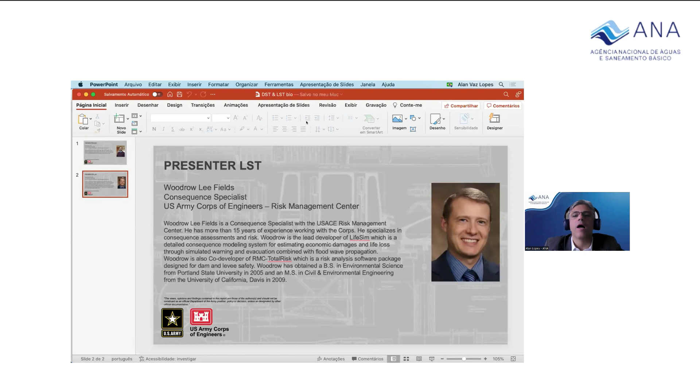So after you, I will introduce Woodrow Lee, who will make the presentation about the tool for levees. So firstly, we will have the DST, the screening tool for dams. Paul, the floor is yours.

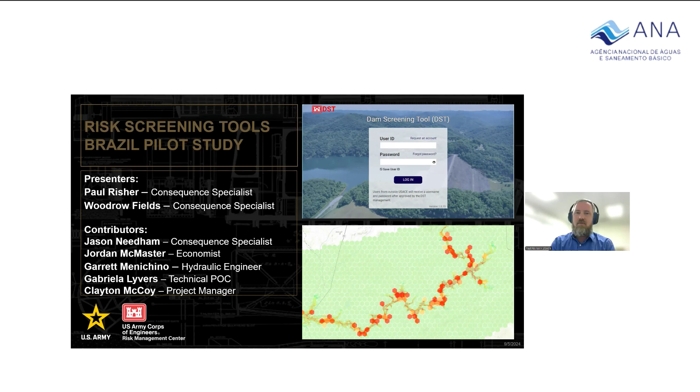An outline for what we're going to talk about today. I'm going to spend a little bit less than an hour talking through the dam screening tool as an overview, and then talking about a pilot study that we did with ANA in Brazil, looking at the results of that study, including a case history for an actual dam failure in Brazil from 2004. And then a little bit about where we plan to go with the dam screening tool in the future.

It's still a work in progress, but my colleague Woodrow will talk about the levee screening tool. And that's kind of where we see ourselves going with the dam tool. The levee tool is much more mature. It is fully built out and has been deployed across the enterprise for the Army Corps. And it's in use today across the Corps for hundreds of levees. He'll give you a lot more information about that. And then we'll leave quite a bit of time, hopefully about 45 minutes, for questions and discussion afterwards.

So first, let's start with what is the dam screening tool? The DST. It's today a rapid consequence assessment tool for flood events. That means that it can make a rapid assessment of life loss and property damage. It's also a web-based application, and most practically, it is just a wrapper for HEC-RAS, which is the Army Corps' hydraulic modeling software, and LifeSim, which is our consequence modeling software. It does evacuations and estimates life loss and property damage from flooding.

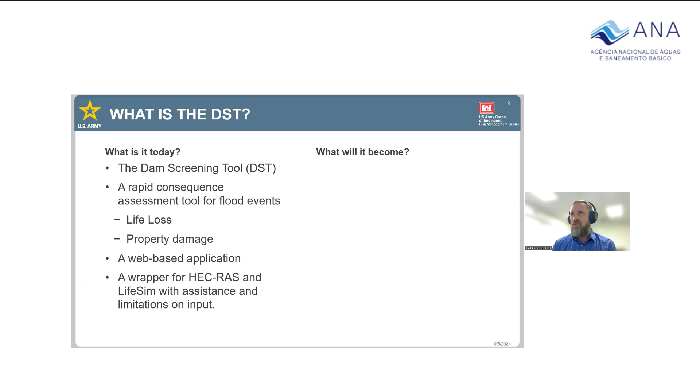So putting those two together in a web-based application, we have some assistance for the user on developing the input for those two models, and then also some pretty narrow guardrails on what they're able to build, meaning that it doesn't have full capabilities of those software, but we're using them to create a screening level, which is our lowest level of risk assessment.

Now, what do we hope the dam screening tool will become? We want it to become a full risk screening tool. Right now, we can only do consequences, but we want it to be able to assist the user with a full screening. That includes a rapid estimate of the hydrologic hazard, the seismic hazard if that is a problem in your area, performance under common failure modes, and ultimately quantifying each of those to calculate the risk.

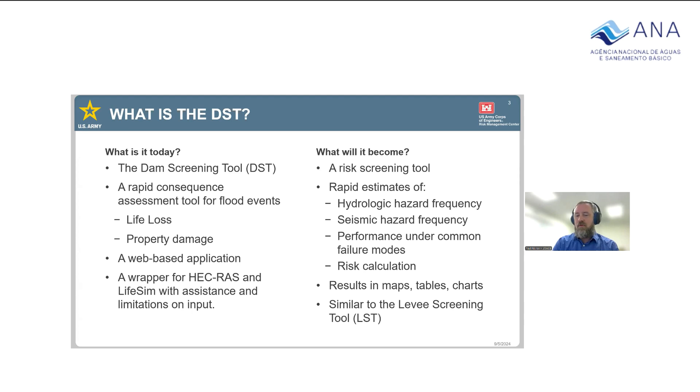So the results then are displayed in maps and tables and charts, and we're really building off of all of the lessons learned and development that has gone into the levee screening tool that we hope to learn from with the dam screening tool. So now for a quick demonstration, what does the tool look like?

This is a dam some of you may be familiar with, a very famous dam failure in the United States in 1971 called the Lower Van Norman Dam. It failed during the San Fernando earthquake of 1971 in Los Angeles. So we modeled this as something of a case study in the dam screening tool. And here you see the first page of what the dam screening tool looks like. So we have a little bit of information about the dam.

We make a link here to the entry within our national inventory of dams. So the Army Corps holds a database of all the dams in the country, federal and non-federal. And there's some pertinent facts about each of those in the national inventory of dams. That's a whole different tool. But we have a link here and we can pull in that information, which includes dam height, how long it is, the storage in the pool, some important information that we can use for the screening.

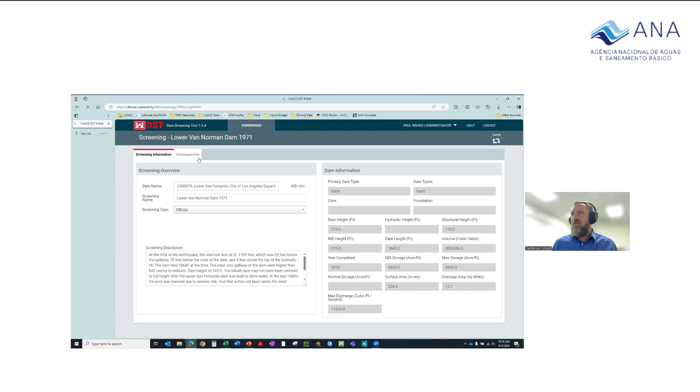So you see here we have one tab available for analysis, the consequence tab, and I'll show you what that looks like. So what this tool is going to do first is create an inundation model using HEC-RAS. We're going to import a structure inventory, which is all of the buildings within the flooded area, including the population that live in those buildings. We're going to set up the LifeSim model, and then we'll have results.

So here you can see where the model is set up. The bluish purple area is the model domain. And here we've set up that model with 500-foot grid cells. I can't do that conversion in my head at the moment, but let's say about 125 meters or so. We've also added some break lines and the dam itself. So the dam is up here at the northern end of the model.

And just a little bit of information about the dam. We know the top elevation is at 1,145 feet. And we're going to restrict the cell size to about 200 feet near the dam to help the hydraulic model remain stable. We also have these break lines in here. So what we're going to do in this blue area is create a hydraulic mesh. And so you can see here what that mesh looks like and how these break lines influence the mesh by aligning with it. So this is the two-dimensional hydraulic mesh for the hydraulic model.

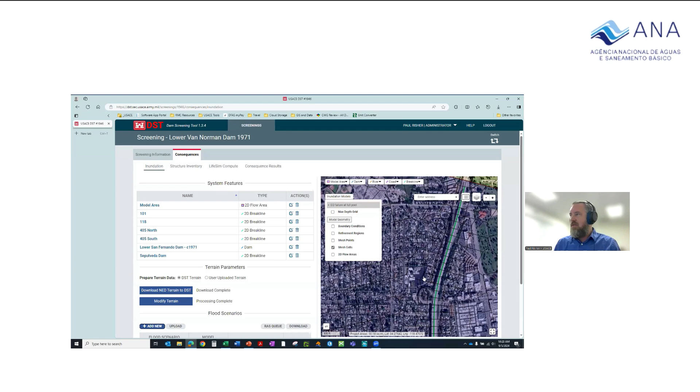And we're enforcing these break lines because they are along highways which are raised several meters above the ground elevation and really are directing the water by causing ponding in this area and forcing the water through underpasses in the highway. So those were important to include.

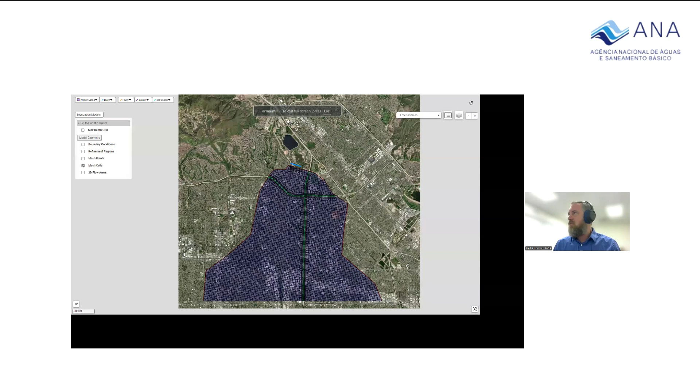I'll show you here what the hydraulic model looks like. You can look at it in terms of a maximum depth, or let me turn some things off so we can see it a little better. We can animate that model from the dam breach as the flood moves through the populated area. Hopefully that's coming through in the broadcast. I'll run it once more. So I think this is really powerful, and we'll talk about some of the other uses of this capability as we go on through the presentation.

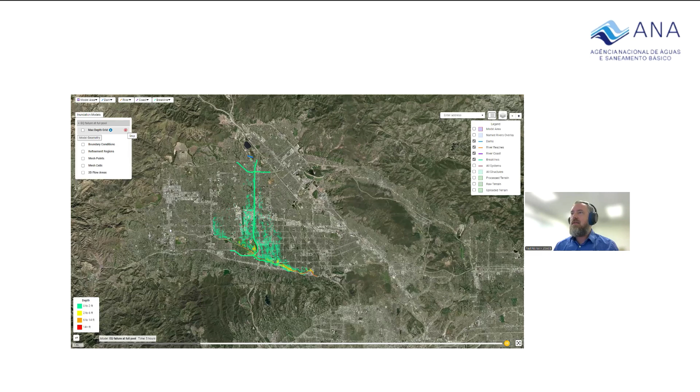So we have the ability here to import terrain directly. We call it DST terrain. Really, it's our US Geological Survey has a national data set of terrain available for the whole United States. And that information is at 10-meter resolution. We can import that directly based on the area that we've selected for the model. Or we can do a user uploaded terrain. And that's what we've used in Brazil so far. You can get that terrain from anywhere, manipulate it how you like outside of the DST, and then upload it here.

We also have the ability to modify the terrain using the break lines. We'll sample the terrain underneath those break lines. And then you have the ability here, for example, we saw a low spot in that road that didn't actually exist. And so we raised that from what was elevation 684 up to 705. So we have that ability to manipulate the terrain for better hydraulic results.

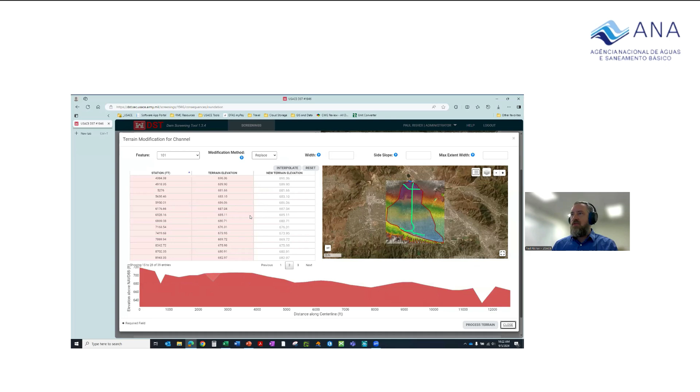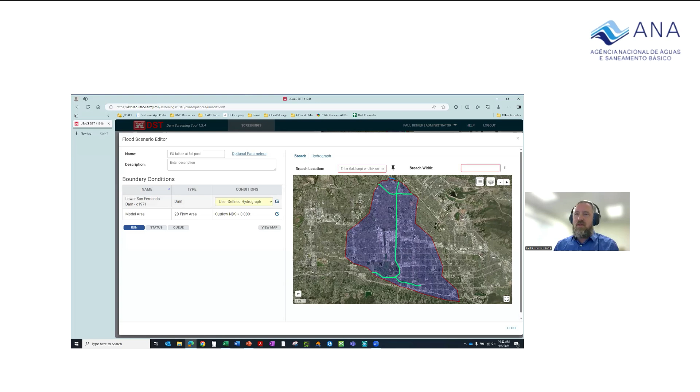Then we're going to create a flood scenario. We see down here, we have a couple options for how to do that. We can input a user-defined hydrograph directly just by entering the flow below the dam with a hydrograph. Or we can actually model the breach. If we assume there's a storage area above it, then we need to give the DST some information about how much water is stored in this relationship.

We need to say that the reservoir is at a starting elevation. Then we can have inflow to that reservoir. We turn this off if it's a sunny day failure. We can have a spillway or gate outlets with an elevation flow rating curve. And then we have the ability to model the breach. So this is a really cool feature.

We have some built-in helping assistance from FEMA; there's a table here of what the FEMA guidance is for how to model a breach. Or, if you have a better understanding, you can enter your own information over here on the right side. And we even include a regression calculator using some common breach methods here: MacDonald and Langridge-Monopolis, Froehlich, Von Thun and Gillette, and Xu and Zhang. These are standard in HEC-RAS as well.

So all that information comes together to define the breach, how wide it opens, how deep it is, and how fast that breach occurs. All very important for determining the hydrograph. So once we have that hydraulic model running, we're going to import a structure inventory. This is a large one because it's in Los Angeles, a very dense urban area. This again is a national data set developed by the Corps of Engineers. We have a point for every structure, hopefully. It's not perfect, but it's pretty good information.

And we have information about what it's made out of. This is a wood framed structure. It's residential, it's one story tall, and it has this population over and under 65 during the nighttime and this population during the daytime. This is how much it's worth and how much the contents and the vehicles at that structure are worth. So all that information is really useful for the consequence model. This is the basis really of the LifeSim model.

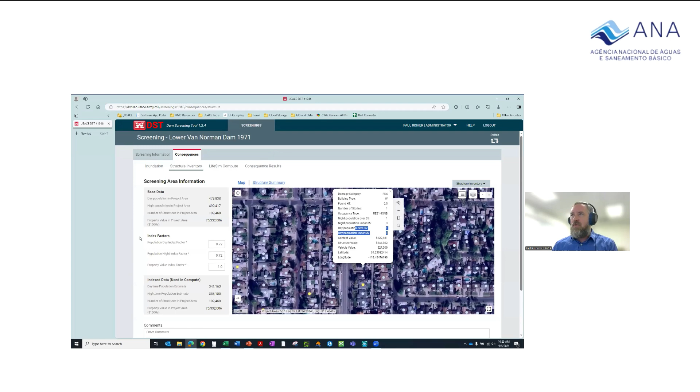Then we have a couple questions to set up the LifeSim model here. Information about how the evacuation planning would happen, the community's awareness of the risk from flooding, and how effective they think the warning will be. So just a couple drop-down lists here, and they manipulate these curves here, which dictate how fast the population receives a warning and then reacts and begins evacuating from that warning.

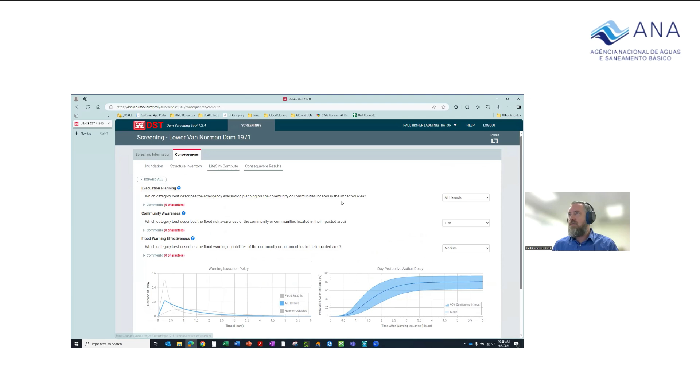The last piece of information is how much advance notice is available before the breach occurs. Are you able to predict that breach or observe some warning signs beforehand and give some time to warn people in advance? And then the results are here. You can see for this failure, we got a pretty high life loss, somewhere in the order of 1,000 to 3,000, depending on time of day.

We can look at the population at risk. We call it the PAR often. Over 100,000 people, 150 to 160,000 roughly. And a fatality rate of about 2% gives us a life loss there of 1,600 to 2,700 on average, and about 45,000 structures inundated.

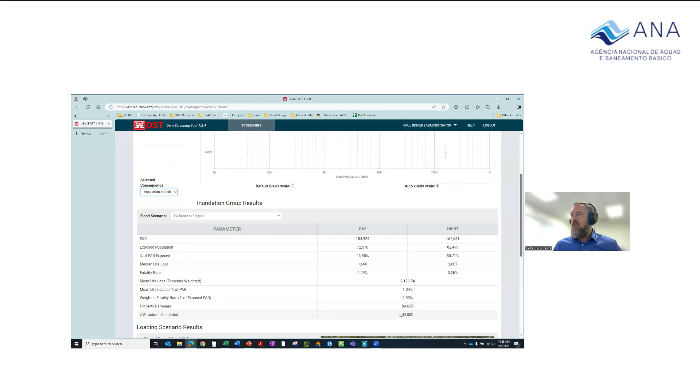So luckily with this dam, when it failed, the pool was low, and so when the crest collapsed and the dam failed, it still luckily was above the level of the water in the dam. If the dam had been full that day, as it had been a couple years before, it could have had very catastrophic results. So that is the dam screening tool in a nutshell, what it is today. I'll move on now to talk about the pilot study.

Some objectives of this study: first of all, we wanted to know, can we really use this dam screening tool outside of the United States? The US is, let's say, a little stubborn about our use of imperial English units. And so we're not always sure when it comes to metric if that will be an easy conversion. And there's also the question of availability of data outside of the US. So we wanted to know, could this actually be done in Brazil? And then what benefits might it offer to ANA and the dam safety community in Brazil?

It has the potential, we thought, for floodplain mapping, for emergency planning, potentially hazard classification, and ultimately the goals for our development of the tool: life loss and damage estimates, and eventually, with full build out, a risk screening. We anticipated some challenges along the way. There's always this trade-off between speed and accuracy of the modeling. So we can get a very rapid result, but is it good enough to make any kind of decision with?

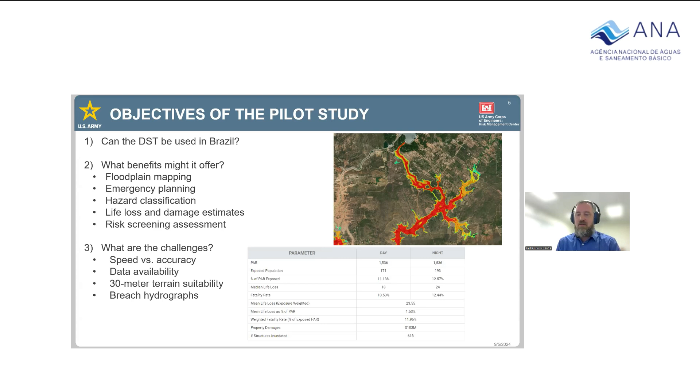Okay, so now specifically about how we develop the input within Brazil. When we're doing a life loss model, this is a typical flow that we go through to develop any LifeSim model. The first is trying to understand the initial distribution of people. So where do they start in the model?

And then we redistribute them, meaning we warn the people that there may be a flood coming. How do they respond to that? Do they evacuate? Are they not able to evacuate? Do they not get the warning? We try to understand that.

So this first distribution of people, I mentioned the national structure inventory. So we have to figure out how to do that in Brazil. Then we're going to redistribute the people. And luckily there's some social science research about how evacuations happen that I think is applicable in any location. And that's built into LifeSim, and we will use that in Brazil as well.

Then we want to understand the flood. We're going to do that in the two-dimensional HEC-RAS model. The model is dependent on underlying terrain, the ground surface, and the roughness of that terrain, which is typically modeled with a land use map.

All that information will give us the arrival time of the flood, which is critical for understanding if the evacuation is effective or not. And then depths and velocities to understand, if people are still there, what hazard are they exposed to? Then we want to know, if they are still there, what kind of shelter is provided by the building that they're caught in, or the vehicle, or if they're just out on foot walking. So those assumptions are also built into LifeSim, and I think they have an international applicability.

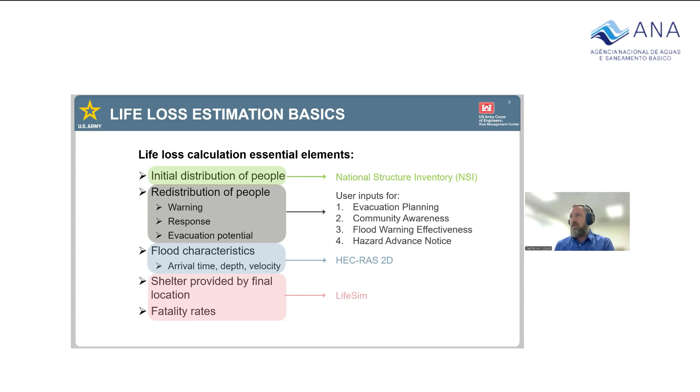So my colleague Jordan McMaster that I mentioned did a pretty amazing effort, I think, to pull together a structure inventory for all of Brazil. We've termed it the BNSI, the Brazilian National Structure Inventory. It basically tried to put a point on every structure in the country the way that we've done it in the United States. We didn't have quite as much information available, but the location information was pretty good.

And then we attribute each of these points in the inventory with some information needed for the model. So we want to know what is the building being used for? That's the occupancy type. Is it residential or commercial, multifamily, single family? How tall is it, if people can get above the flood? What's the construction material? How high is the foundation that raises the structure out of the floodwater?

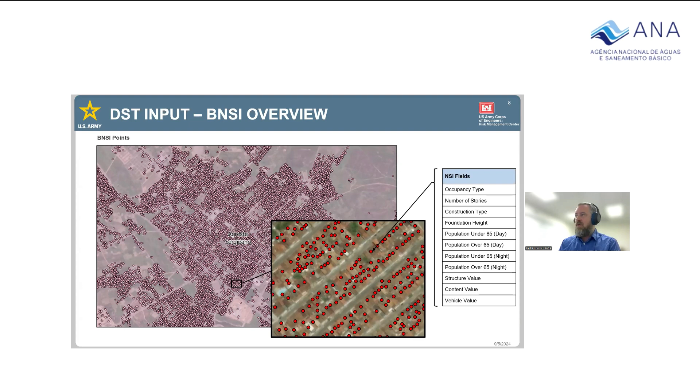And then what is the population, daytime, nighttime, and elderly and below 65 population? And then how much is the structure worth? Things I mentioned before. So we struggled with some of these, had a little more success with others.

So first of all, the location was set by Google's Open Buildings. It's a global data set. It included about 129 million structures in Brazil. This is mostly an AI, artificial intelligence, using whatever information Google has, elevation, aerial photos, to ascertain whether a structure is located there. And that data ended up being pretty good for us. It matched pretty well with what you see here of real structures. So that was the base layer.

Then we added the population. This was based on 2021 census data from the Institute for Geography and Statistics. We used age 60 as a dividing line. In the US, we have 65 as our limit between normal aged and elderly. In Brazil, I guess that's more like 60. So we used that instead.

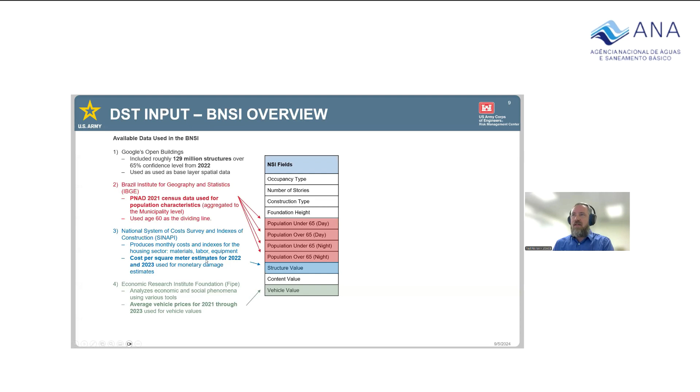And then we have the structure and the vehicle values, using a cost per square meter estimate from this national index, and the vehicle values using just average estimates. So that left several fields with not very good data. We had to make assumptions for those.

So we assumed every structure is a single family residential structure, 1 story tall, made out of wood, and assumed to be 0.15 meters of foundation height above the ground. And then the content value is 50% of the structure value.

The terrain, we wanted to test the difference between a 30-meter terrain and better quality LiDAR. So ANA provided us with some LiDAR. This is an example for one dam in the pilot study, Negreiros Dam, where we had a small area of 1 meter DEM and we supplemented with 30-meter DEM for the rest. So in actuality, the 1 meter DEM was probably too good for hydraulic modeling.

And so we downsampled that a little bit to a 3-meter resolution to reduce the file size. But also we found that that resampling didn't impact the hydraulic results very much. Where we were missing the 1 meter data, we supplemented with 30-meter.

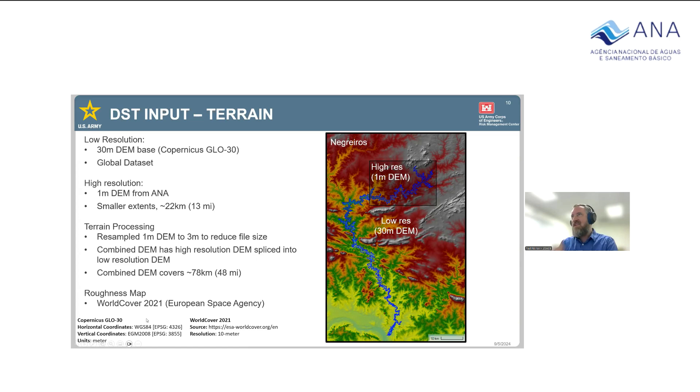Looking at the differences between those DEMs, here's a cross section on a river. You can see the low res terrain, maybe a little bit shifted. It may have some differences from the higher res terrain, the darker blue. But the important thing here is the difference between the 1 meter and the 3 meter where we downsampled is barely visible. Those are the 2 dark lines together.

So we noticed in the 30-meter that some of the channel, these deeper parts of the channels here, may not even register in the 30-meter. So it may underestimate flood conveyance, which can lead to overestimating consequences. It lacks some detail.

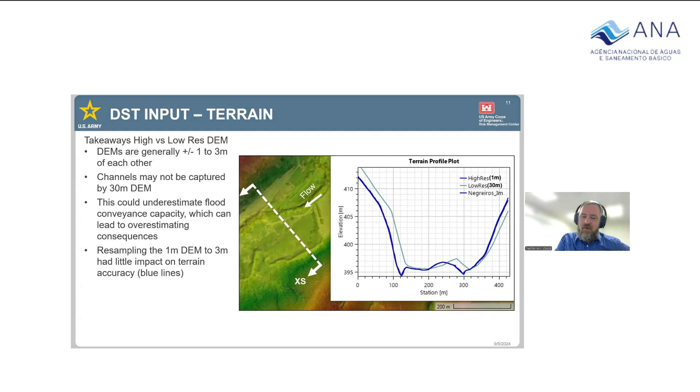I think it's also important to note that the 30-meter DEM is actually a digital surface model. So at times buildings and treetops can get in the way of that terrain because it's bouncing off of those from space. It's not sampling the true ground, which the water will be flowing on, but at times it bounces off trees and rooftops, which can be problematic.

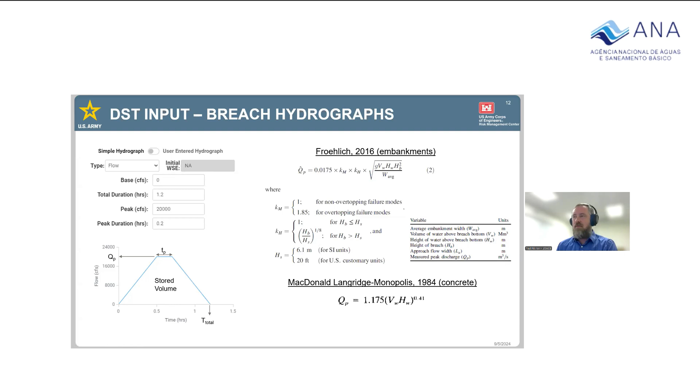We also wanted to look at modeling the breach explicitly using parameters of the breach that describe the geometry and how fast it opens. So we get a more realistic breach hydrograph and use that function that I showed you before with the breach regression calculator. So we put in a little information about the dam and the reservoir, and we get some regression output here, and that's what we use to develop the breach hydrograph in those cases where we model it.

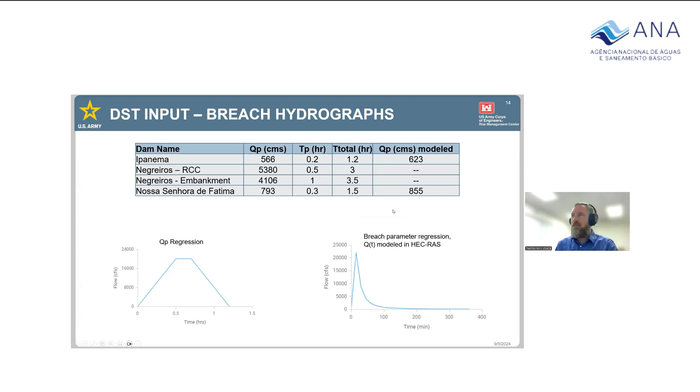So here are the results from the development of the hydrographs. We looked at 4 different dam breaches. You can see them there on the left. These were the peak results that developed the trapezoidal hydrograph with those times. And then we modeled 2, Ipanema and Fatima. And this is the difference. So you can see the peak is a little bit higher in each of those, but we reach the peak much more rapidly. It's a much steeper hydrograph, and it comes back down very quickly. But the peak is higher. So we'll see the impact of that.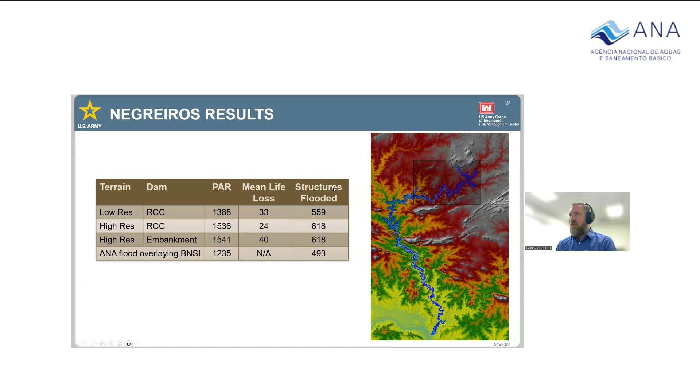So we've got the 2 floodplains combined, they're overlaid on each other. But there's a lot of population in this area that could be affected by a breach of that embankment. Whereas if the RCC dam breached, they're not really touched in that area.

The third dam that we looked at in more detail, again, it pretty much stayed within this channel. Looking at the difference between the high and the low res terrain, we see an increase in population, an increase in structures flooded, but basically the life loss is the same for each. And then between the breach methods, the modeled has a lower life loss.

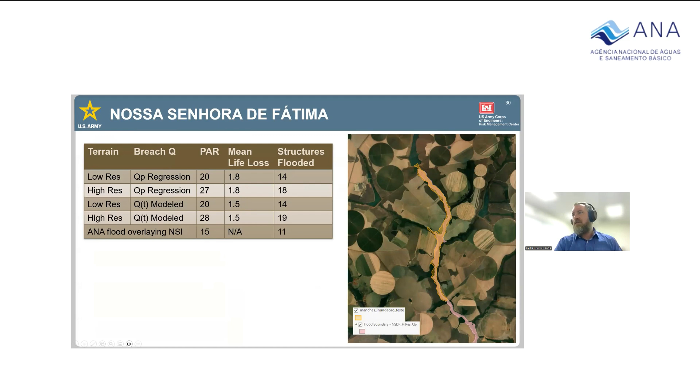So looking at how did the DST work with the 30-meter terrain? Comparing all of these dams, we saw some trends in the results, and that was that higher resolution resulted in more structures being flooded and a higher population at risk, but a lower life loss or the same life loss in every case. So you can see here those trends. PAR goes up, life loss goes down.

We think that's probably due to better definition of the edges of the flood, so that we're including more people with just a little bit of water, but we're getting more accurate depths throughout the floodplain, because typically people are building their houses a little higher up out of the floodplain, but the 30-meter DEM may not be capturing that. And so it has one water surface across there that's not providing good resolution in the depths. So we're seeing better resolution, more accurate depths, and therefore a better estimate of the life loss.

But interesting to note here is that these are pretty close, basically in the same order of magnitude. And so from a screening level approach, the results are not that far off.

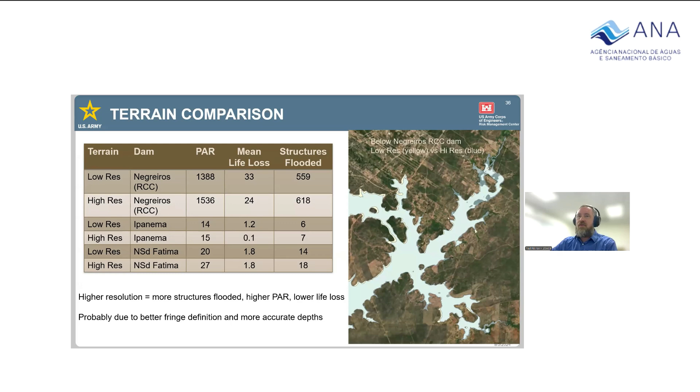So there's two ways this could have gone. Maybe that dam would stop the flood from continuing on, or maybe it would be overtopped and fail and contribute more water downstream that had been stored behind that dam. So hard to know there which way that would have gone, but some error in our estimates for sure.

So we spotted several instances of hydraulic issues. And so in running this model, it's still good to have a hydraulic engineer be able to look at the results and assess whether or not they're reasonable. We saw some disconnected flood areas. That happens when you have grid cells that are too big and water can just kind of skip between cells. We've got to make sure that there's proper representation of linear embankments, which really direct the flow, especially elevated roads, railroads, and levees.

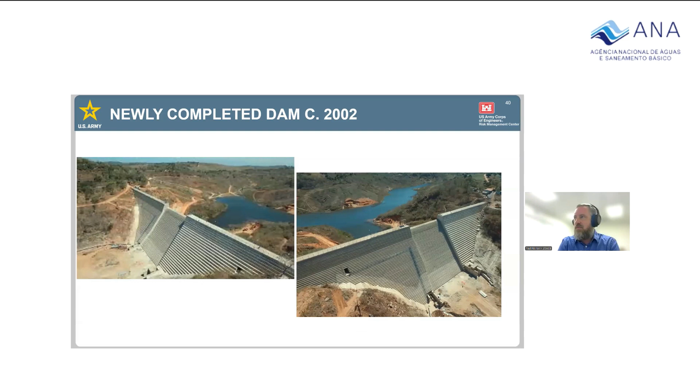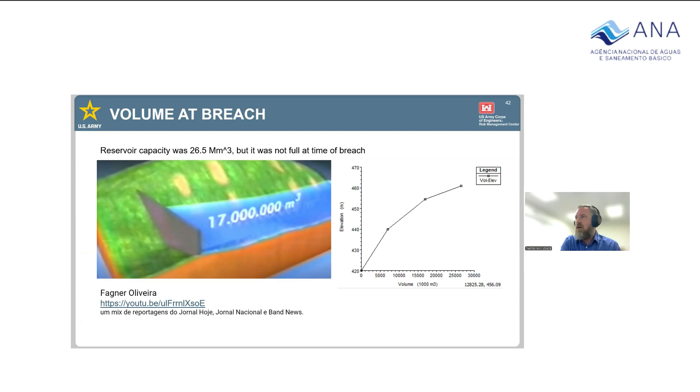So it was not full, but we got enough information to build a capacity curve to know how much water was in there at the time of the failure. Then this is what the breach looked like. It was an oddly shaped breach. It popped out this section of the dam like a cork out of a bottle and took a piece of the abutment rock with it, and it just slid out. It was a very loud failure apparently, and it was witnessed by at least a couple people who tried to warn those downstream.

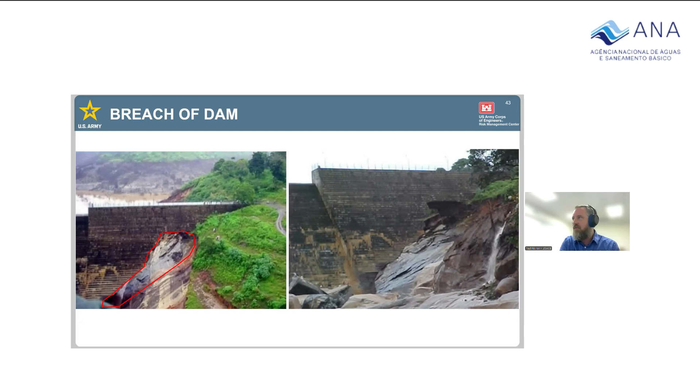So I attempted to model the shape of this in HEC-RAS and to try and develop a breach hydrograph from this failure. So we got some measurements of what that breach looked like, assumed it was somewhat of a rhombus shape, and then turned that rhombus into a rectangle and tried to get that into HEC-RAS, more or less successfully, with a 12-meter wide breach, 30 meters tall.

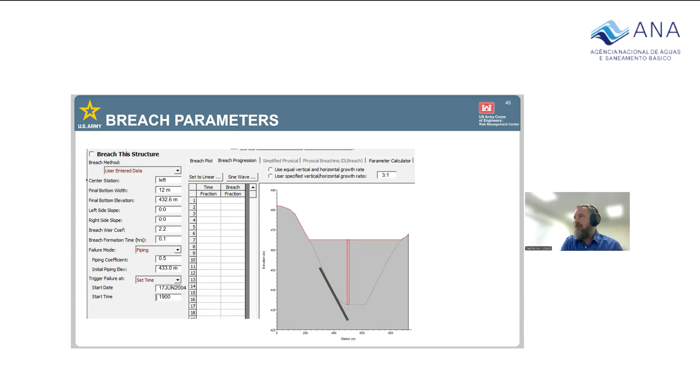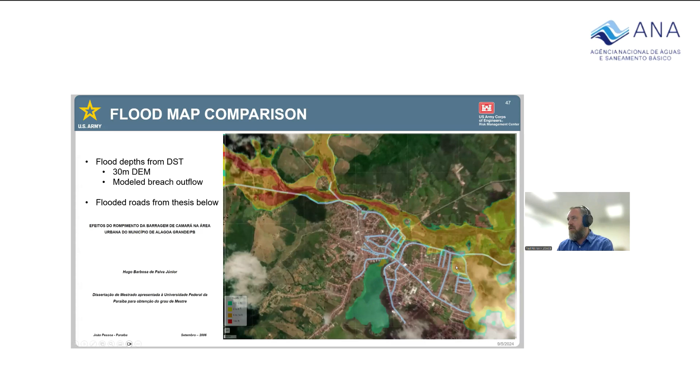We learned from that paper also that there was a total life loss of 5. 3,000 people were in homes that were damaged, in a total of 810 homes damaged or destroyed. Here's our results from the DST. We have a population of about 1,800, so we're underestimating there. But we're overestimating the life loss by a bit. We got about 50. And a total number of structures, 738 structures. So a little bit low on that estimate as well.

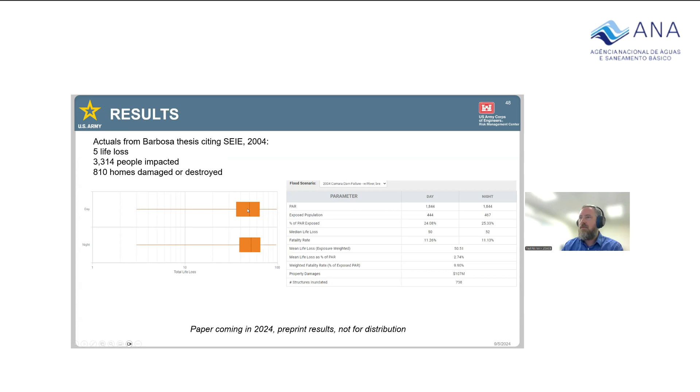Here's our results looking over the whole range. So LifeSim, I hadn't mentioned before, does uncertainty sampling using Monte Carlo analysis. So it looks at many different options for warning and evacuation times. And so these are the results of 1,000 simulations with an average of about 50 life loss and a range from 3 up to almost 100. So looking at some of our assumptions here, the actual life loss is about 5 and our range here is from about 3 to 100.

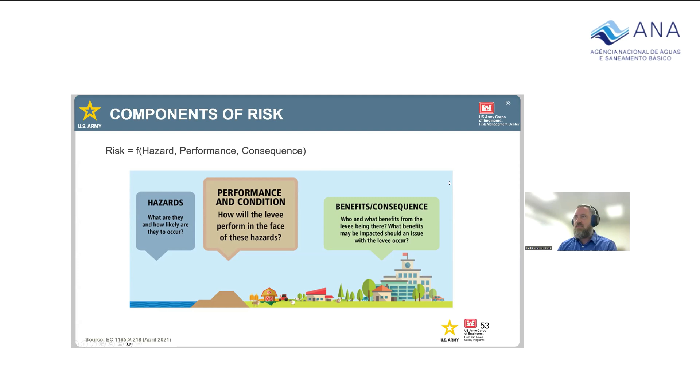So this is the setup for levees. It's already been implemented in the levee screening tool that Woody's going to talk to you about next. This is where we hope to go, getting each of these pieces of the equation together in the dam screening tool. So we currently have one tab in the DST. This is what the build out looks like in the levee screening tool: hazard, consequence, performance, and then the risk computation and some results maps. So that's where we're hoping to go. And I'll turn it over now to introduce my colleague, Woodrow, to talk about that tool.

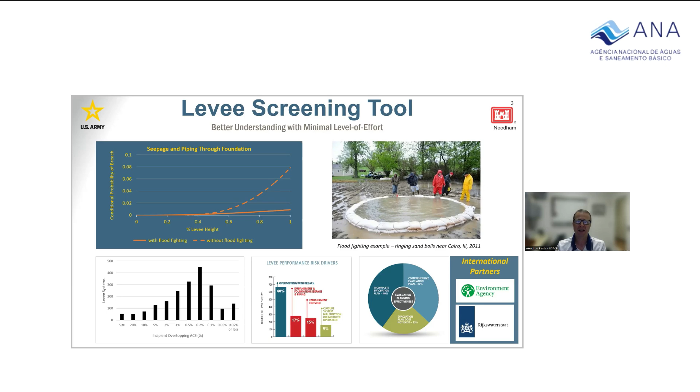Beyond that, we need to be able to take the results of these efforts and share them with local and state partners so that non-federal levees are made aware of their risks and the findings that we have, so that they can take efforts to improve the safety of those living behind the levees.

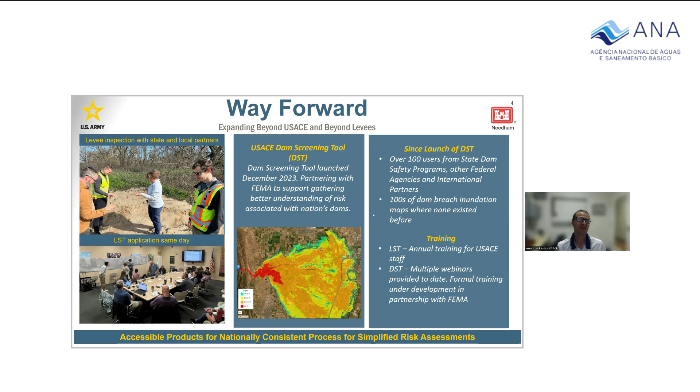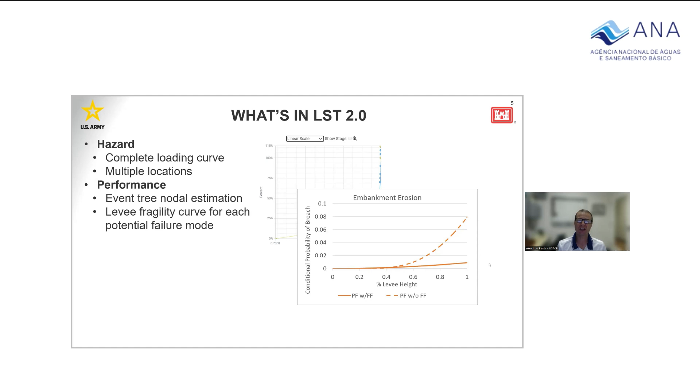So I talked about what the need is for it and the overarching goals of the levee screening tool, but what's in the actual tool itself? To do the risk assessment, we need to provide a hazard function that gives a return interval. How often is this levee going to be loaded with water? The performance of that levee when there is water in the river loading that levee: what's the probability that it could fail due to various failure modes? And then if that levee fails, what are the consequences associated with that failure event? We need these three fundamental pieces of information to be able to do a proper risk assessment.

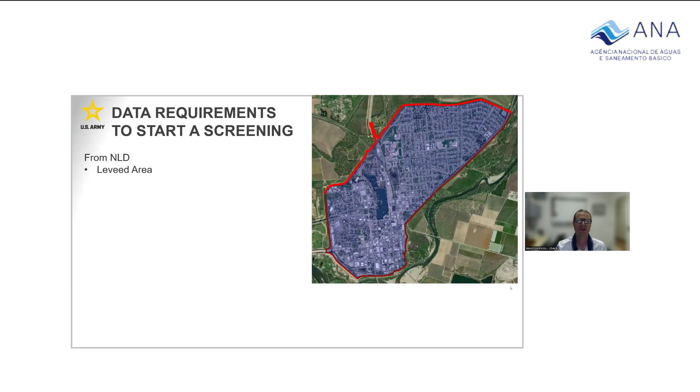Some of the data requirements to start a screening: we pull information from our National Levee Database in the form of a leveed area. That leveed area represents all the area that levee is protecting. If a failure of that levee were to occur, everything within that area could potentially get inundated. We use that leveed area as a foundation starting point for our hydraulic model as the two-dimensional hydraulic mesh. The second piece of information we get from the National Levee Database is the levee alignment itself.

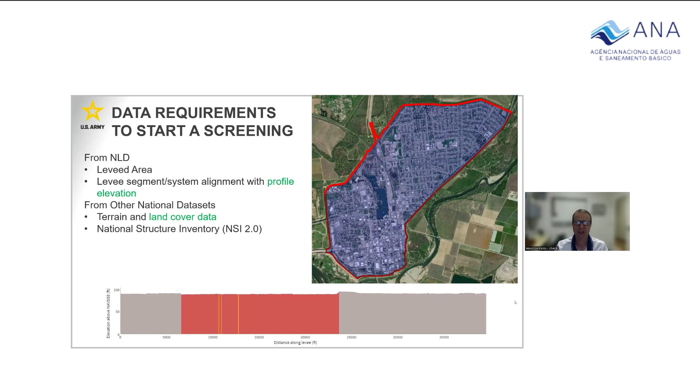It's a line shapefile, a geospatial line in space. And along with that line in space, the XY data, we also want the Z data, the vertical elevations associated with that levee. And then from other national data sets, we pull terrain and land cover for our hydraulics, the National Structure Inventory for structures and population distribution, and then critical infrastructure.

The hazard loading function is defined by the user in the tool. And the minimum required information by the user is what's the return interval of flooding to reach the levee toe? What's the return interval to reach the top of the levee? And then 3 feet above the levee. Those are the requirements. And then everything in between would be log linear interpolated.

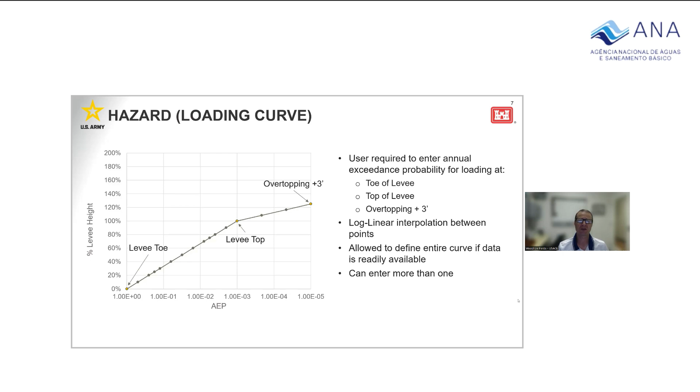However, if there is more information available, then the user can go in and define the hazard function however they want. On top of that, you can enter multiple hazard functions throughout your levee segment. An example of this might be in a coastal situation where you have the upstream land side of the levee loaded primarily by the river, and the downstream side on the estuary loaded primarily by the coast by wind wave action. You can have different loading functions to represent those different loading scenarios.

Now we get to the performance piece of it. In the levee screening tool, we have a predefined number of performance modes, of failure modes, potential ways that the levee could fail. Depending on the type of levee system, you'll select from those failure modes that are common for various types. For example, if you have an earthen embankment levee, then you have 4 performance modes that you can assess: backward erosion and piping, slope stability, riverine erosion, and concentrated leak erosion. These are different failure modes that you can assess at locations along your levee system.

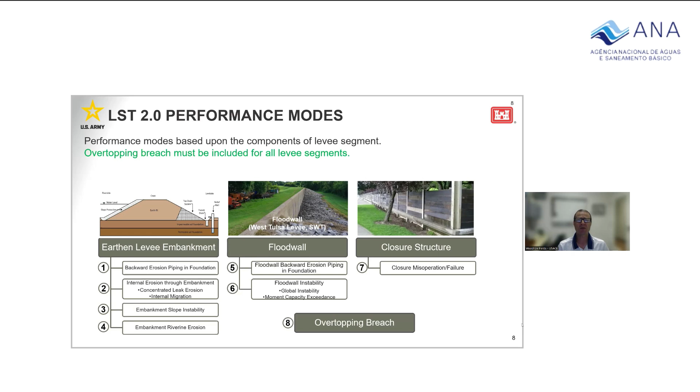If you have a flood wall, there's 2 flood wall failure modes that you can assess. And if you have closures, then you can assess the probability that that closure does not get installed in time or gets installed inappropriately and fails. And then finally, the final failure mode that we're including is overtopping with breach. As we saw during Katrina, many levees overtopped, and that overtopping led to a failure of that levee, pushing a slug of water into that leveed area and causing excess life loss. That probability of failure when overtopping is assessed in the levee screening tool.

For each of these failure modes, the user enters in their likelihood of an event occurring using the event tree structure to look at probability of failure. And by event tree structure, that means that we're looking at the sequence of events that lead up to the failure of the embankment of the levee. For example, if you have backward erosion and piping, that is going to initiate at some point, depending on your embankment materials. That initiation can progress into a seepage pathway. That progression can continue and continue growing until eventually it breaches.

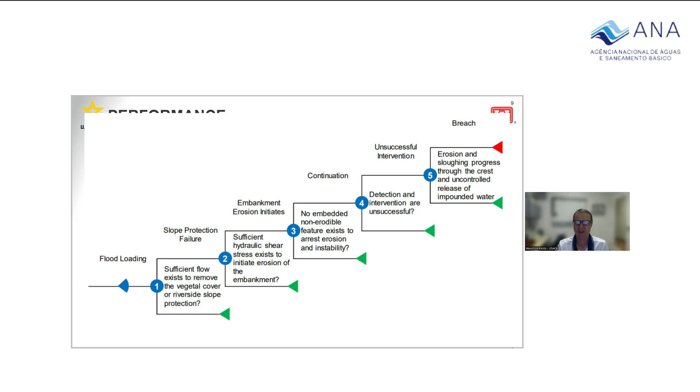These sequence of events, each component of that sequence is assessed individually through an event tree. And the user, the assessor, will assign the likelihood of each of those events occurring. And that comes up with your quantitative probability of failure by assessing the probability of each of these nodes occurring in the sequence that leads up to that failure mode. Once that's assessed, what's the probability that this levee is going to fail due to this failure mode when loaded to the top of that levee?

A curve is then fit to that. A curve is fit to that probability of failure loaded to the top, based off of what we have as an incident database of thousands of levees throughout the nation and their history of loading, and if they failed or not. But not only that, how they failed. So we use this database of levee loading events to inform the probability of failure as we go below the top of levee.

So we fit a distribution that simulates the conditional probability that this levee fails at various loadings of that levee. So probability of failure at 50% loading of the levee, probability of failure when it's loaded to the top, and then even extending beyond the top, probability of failure when it's 1 foot above the top of levee.

That's the performance piece. Now the consequences. I think you all have a pretty good understanding of how the consequences work in the levee screening tool because of Paul's presentation on the dam screening tool. In the levee screening tool, however, there's multiple scenarios for each location where you define a breach. And those multiple scenarios are, what are the consequences if the breach occurs at 25% loading of the levee, 50% loading, 75%, and to the top?

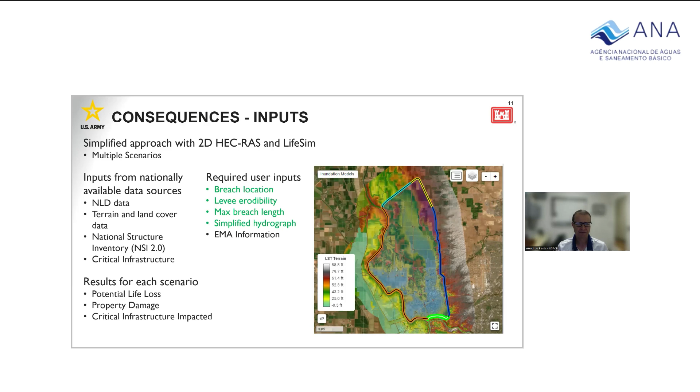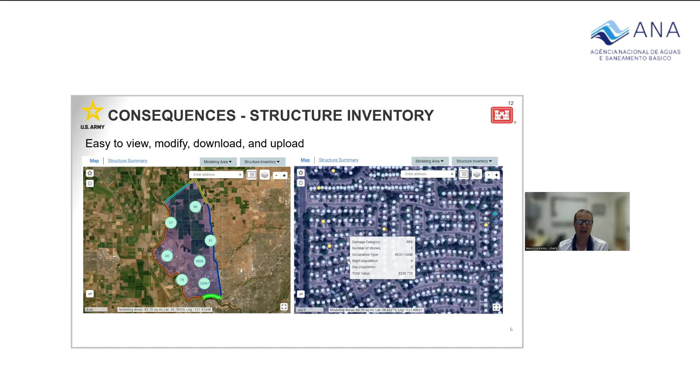Structure inventory, as you saw before, comes from the National Structure Inventory. There's a lot of tools to easily view, modify, download, and upload a structure inventory for the study area. As I said, the 2D hydraulics are coming from HEC-RAS, where you get an estimate of the maximum depths that are occurring in your leveed area, along with the time series of depths and velocities that are occurring within the leveed area.

The results of this analysis go beyond just the consequences, beyond just what's potential loss of life, what's potential economic damages. Because it's a full-on risk assessment, we can get a lot more information out of the analysis. For example, we can look at what failure mode is contributing to the annual probability of inundation.

Is it due to overtopping without failure, meaning it really doesn't matter if the levee's there or not? It's a 1 foot tall levee or a half a meter tall levee, and it's just overtopped all the time, and the consequences are going to be there no matter what. The incremental consequences are very low.

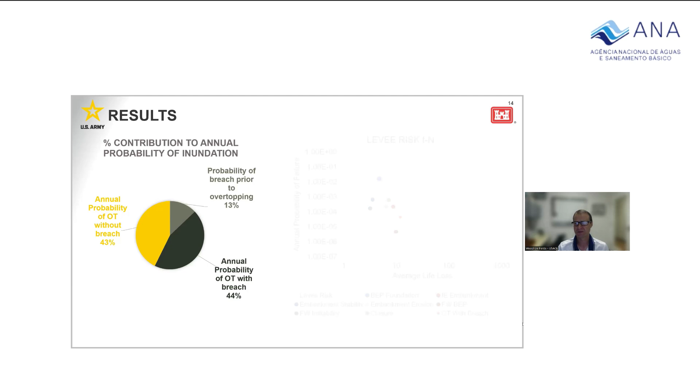Or is it the annual probability of overtopping with breach? Is the failure really contributing to the overall probability of inundation here? So we can start looking at what's contributing to the probability that people are going to get flooded. And then the plot that I just showed you here is what we use primarily for our decision making in the Corps of Engineers.

On the y-axis is the annual probability of failure. Each of the circles in the plot represents a failure mode, the risk analysis for an individual failure mode, and the square represents the total incremental risk associated with that levee. So the annual probability of failure on the y-axis, the x-axis is the average life loss that is expected to occur given a failure.

So if we look at this individual system, we can get an estimate that the annual probability of failure is between 1 in 100 and 1 in 1,000. And the average life loss given a failure occurs is going to be between 1 and 10. We can then rank that against other levees in our portfolio to get a sense of which levees have the highest probability of failure and which levees contribute most to the potential for life loss. And then we can start addressing those first and fixing those levees first to reduce the overall risk across our entire portfolio of levees.

Some other risk nuggets that come out that are really useful are the total flood risk. So the previous risk was looking at the risk imposed by the levee structure itself. And that's what we care about as an agency that's managing this levee. But for those living behind the levee, what they care about is not just the risk imposed by the levee itself, but what's the risk of flooding due to any means: natural flooding, levee failing, any means whatsoever. That's where we have these flood risk metrics.

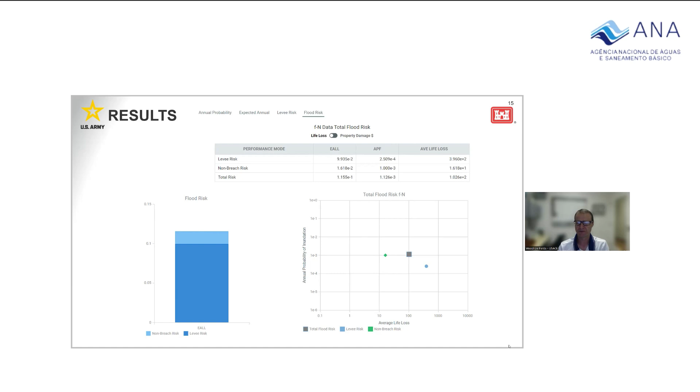These are all really great tools that we can use in the United States for looking at our portfolio. And these are really detailed analyses that we can do at a screening level. But one of the most important pieces of this entire process is the review. Built into the levee screening tool are multiple levels of review to ensure that those risk estimates, those life loss estimates, the return intervals associated with the flooding, the loading of those levees, the probability of failure given those loadings, are reviewed to ensure that those risk assessments are relatively accurate.

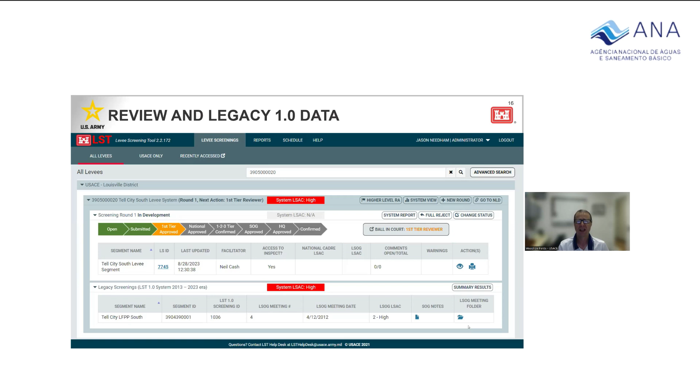And so we have this review process of multiple tiers and national groups meeting and analyzing and assessing the risk analyses, and then allowing them to kick back for refinement and then send back up the change. So multiple levels of review are critical to the success of this program.

There's two steps in that review process that require a presentation to a group of experts. One is a national cadre of reviewers, a national group of experts that's going to review it, provide a more detailed and thorough review analysis, and a lot of comments on what can be improved, what can be fixed, essentially like an agency technical review. Then the second level review is a senior oversight group level review, where these senior experts will again review it and then potentially send it back for comments before it finally gets that stamp of approval and gets sent on.

The screening tool was designed so that it's easy to navigate within the user interface, so that those who did the risk analysis with the tool can present directly from the web interface. And that makes it really nice for the group to be able to dig down and identify what's driving the risk for these individual systems that are being analyzed.

Finally, some of the standard operating procedures and policy highlights from all of this effort. One is that the screening team needs to be coordinated and collaborative. It's not just one engineer doing the work generally. For a levee screening analysis, you want somebody who's going to be an expert in hydrology and looking at rainfall runoff and frequencies of loading. You want an expert that's going to be strong in geotechnical background, understanding what leads to the probability of failure of a levee, understanding the mechanisms that drive probability of failure.

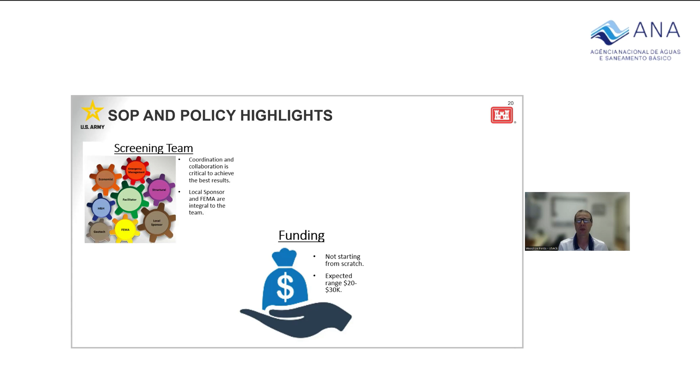And then another important piece of this is that we're going to do this one-time risk analysis for every levee in the nation, but for the Corps of Engineers, we rescreen every 10 years, because as we know, risk is not a constant. Factors lead to risk changing. Also, as development occurs in low-lying areas, the consequences if a failure occurs are increasing, and the probability of that failure occurring is also increasing through time. So risks are increasing through time, changing. We need to be able to rescreen, redo this every so often, so that it's a dynamic system and we can change our risk assessments as the risks are changing through time.

With an effort like this nationwide, we have to build a lot of additional resources. Resources come in the form of help through the web interface, through an applications manual and a technical reference manual. And then there's frequently asked questions and a levee screening tool help desk that people can email for support. Also, there's training. There's annual training on the levee screening tool provided here in the US, and all of those training materials are provided online for free. And those presentations are recorded so that you can view the presentations, do the workshops that are part of those training materials, and get comfortable with the tool.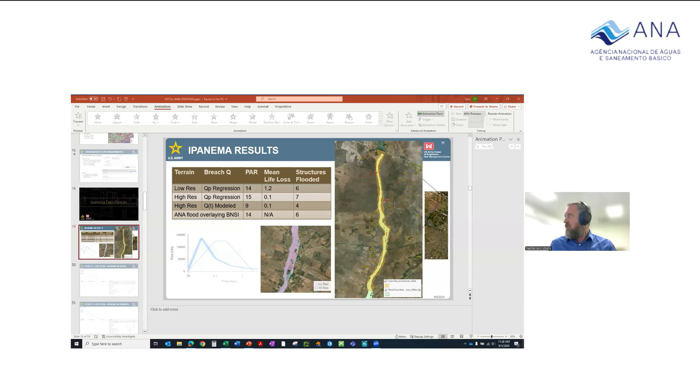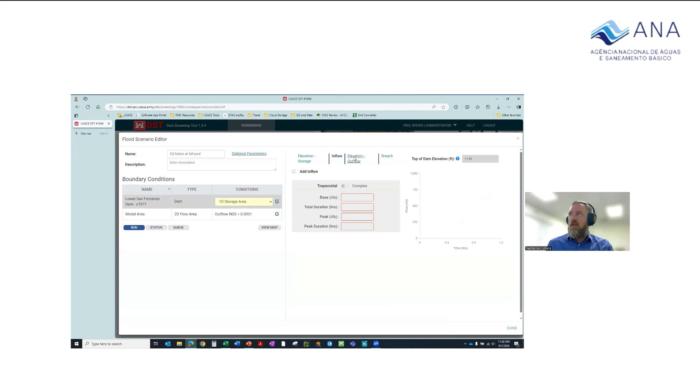And then within the dam itself, if we're modeling the reservoir behind the dam with a storage area, we can add inflow to that reservoir with a hydrograph and then model the spillway flow. So we know water is coming into the reservoir, going over the spillway, going downstream. All of that happens before the breach. Then the breach may be triggered at the highest point of the inflow hydrograph, for example. So it happens sometime later, and all that's possible in the hydraulic model. It's obviously more complicated, more information to consider for a flood-induced breach as opposed to a sunny day, maybe seismically induced failure or a leak of some kind.

Paul, I'd like to add on to that. That's absolutely right. If you want to look at coincident flooding, flooding happening elsewhere in your system, the tools Paul just showed give you that. And then if you wanted to do rainfall on your 2D mesh, say you have an isolated thunderstorm that's causing flooding internal to your area, not just at the dam, but also at your downstream location.

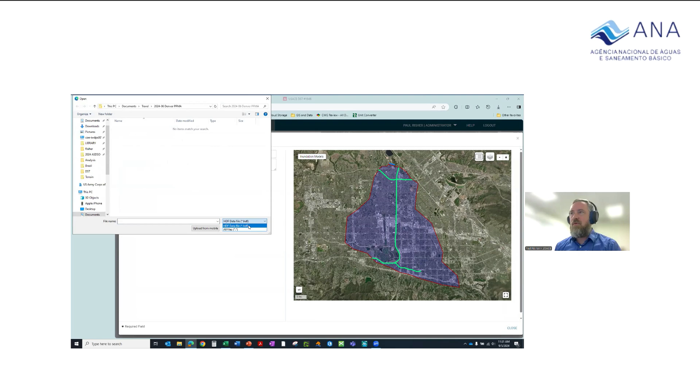You can't do rainfall on your 2D mesh directly in the dam screening tool, but you can do that in HEC-RAS. And we have an option here to upload your own RAS model. So you could create the model on your own in HEC-RAS with rainfall on your 2D mesh, then upload it to the dam screening tool. You could get as detailed as you want with that model and then upload it. So the functionality is there, but to make it easier at a screening level, we've tried to reduce some of that more advanced functionality. This shows the option to import the HDF file from HEC-RAS, which is the hydraulic results from that model.

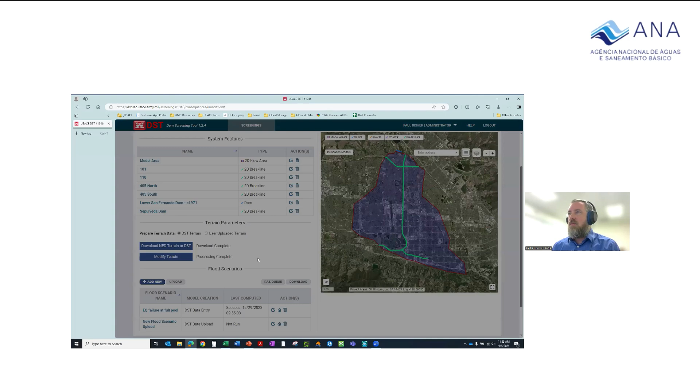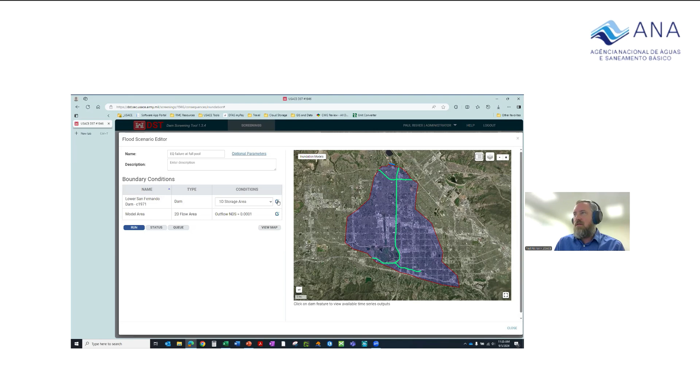That's why I think it's always important to have somebody who has familiarity with dam breach modeling to do this part of the analysis in dam screening tool, because you can get results that are not very useful if you're not modeling the breach properly. So we made this tool to be very convenient and useful and easy, but it's not just pushing one button and getting a result that is good. It requires some more critical thought about what the input is doing and how the results are looking.

So I think, yeah, it's always going to be an issue. We've hopefully built in some functionality to allow the user to manipulate the breach to make it more reasonable, and to provide simplified assumptions if those look okay. And I'd add on to that.

It's also important because it is a screening level tool, and there are some very broad assumptions made, that sensitivity analysis is critical to understanding: does the breach progression rate really matter in this situation, or does the population at risk have a big impact, or the warning time? There's a lot of factors with the hydraulic model and the entire analysis that there's a lot of uncertainty about, and being open about that uncertainty, changing these parameters, rerunning the model and seeing how that impacts the results, I think is a critical part of the process.

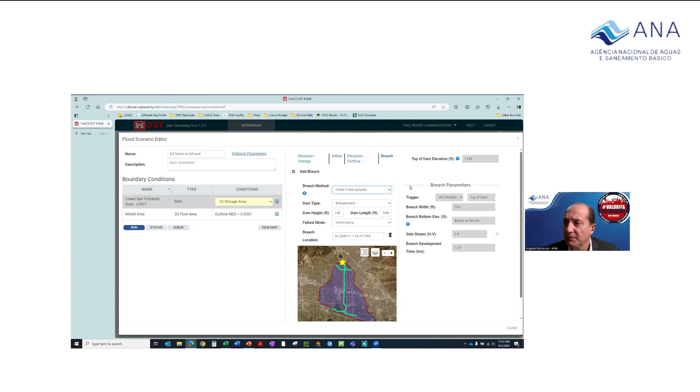Perfect. Thank you, Paul and Woodrow. Another question. Is it possible to use observed data for the model calibration? In general, yes. We don't allow model calibration inside of the screening tools. Again, coming back to the idea that these are screening level, typically the models are not calibrated. It's best practice when you're developing a hydraulic model to make sure that you've calibrated that model.

But these are models that are typically a lower level of quality in general. And so they're not calibrated to events that have been observed, because the events that we're looking at have never been observed in most cases. The failure of the entire dam is not something that you've seen anywhere close to that amount of water in the system before. So calibration is really difficult in general due to lack of data.

And again, because it's a screening level, we're not really trying to enforce that. But you do need to be able to look at the results critically and say whether they're reasonable or not, even without that calibration. So if you have data that's useful for calibration, you can download the hydraulic model, import the observed data into the full software desktop version of HEC-RAS and do a little more calibrating that way.

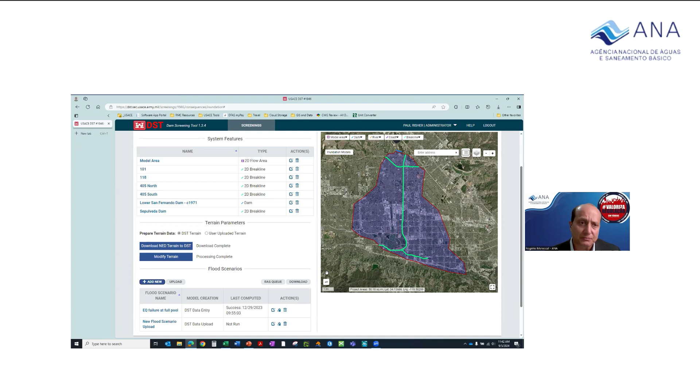I have a question. In general, in the US, to make this hazard potential assessment, you do run a sunny day scenario. Am I right? And the other question is, if you consider somehow incremental damage, and if this is possible, what would be the hypothetical scenarios for that increment, or you do not use this?

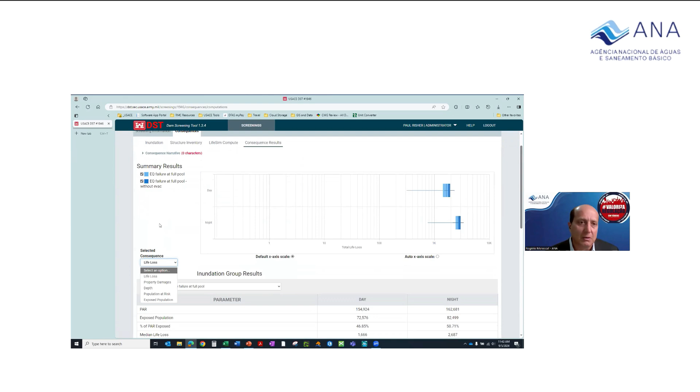So for the sunny day scenario, we would assume that the impacts are, okay, sorry. So the incremental life loss is the difference between the life loss with the dam operating as it's supposed to operate. So you can have some spillway flows that flood people and cause life-threatening conditions if the dam works perfectly. Above that, if the dam fails, it'll make a larger flood more rapidly, and you can have more people exposed to more dangerous conditions. That's the incremental life loss above the base life loss.

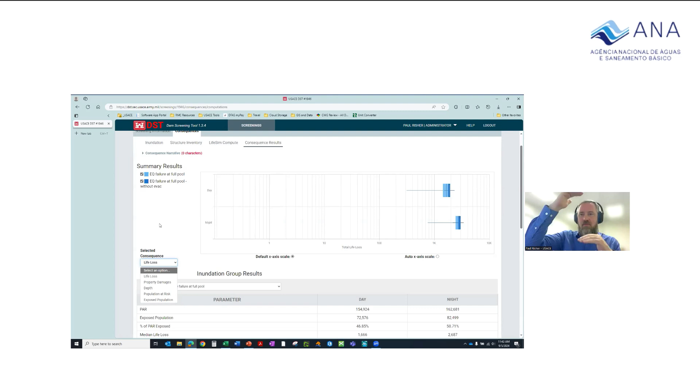So for a sunny day condition, we would assume that the base life loss is 0, and anything coming from the dam failure is incremental. For the hazard assessment, in the United States, it's our policy to run a sunny day failure without evacuation. So we have that option here, no evacuation, to compare the results and look at how life loss may be impacted that way. It's kind of a peculiarity of our regulations on that hazard assessment. Yeah, I'll add on to that, Paul.

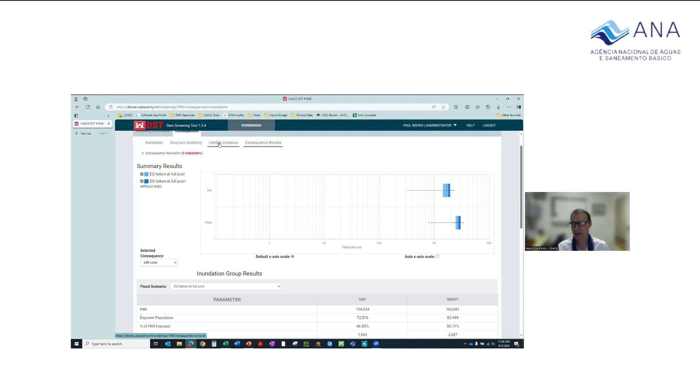So the DST currently is looking at a single event failure, whether it could be a single event consequence assessment, and that could be a failure of the dam. It could be overtopping of the dam without failure. We could even run it where the dam doesn't fail and it's just the spillway flows.

Where we're going is in the same direction as Levee Screening Tool, where we look at the chance of failure and not failing for a range of loadings on the dam. So if the dam's at its normal high pool level, or if the dam's at the spillway surcharge level where it's actually spilling but not failing. So we're looking at both fail and non-fail scenarios.

And then as Paul said, we're looking at that incremental risk, the risk imposed by the structure of the dam, by taking the life loss of failure and subtracting out, as if it didn't fail, what was the life loss. And eventually those two curves come together, right? Eventually you have a flood that's so big, it doesn't matter if a dam is there or not. And at that point, the incremental risk is 0. And that's how we're assessing it.

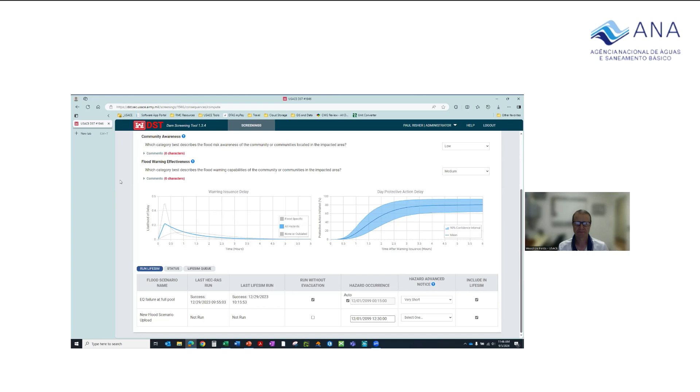So I guess you can do each of those individual scenarios currently in the dam screening tool: sunny day failure, non-failure, overtopping events, with failure and without failure. But where we're going is that you'll do all of those scenarios to do a proper risk assessment. And then with those points, you can build a curve of probability and life loss.

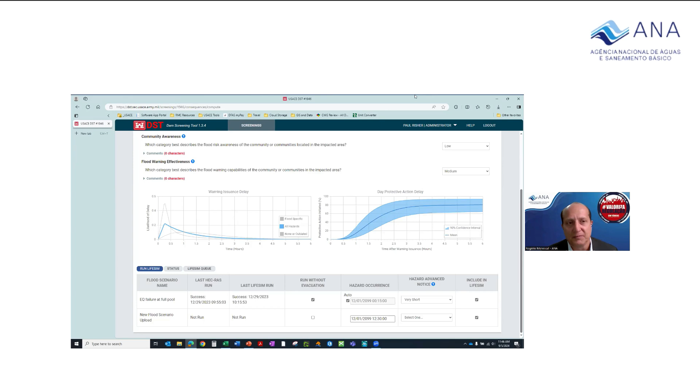Thank you for your answer. Another question for Woodrow is that in the case of levees with many km of extension, I suppose that you run scenarios from different points of the levee, right? You make the simulations in different places for different locations, right?

That's correct. Yeah. So especially that's important for long levee systems, right? Where you could have a city on the upstream end and all farmland on the downstream end. So it's important that we assess the risk at multiple locations, not just where it's most likely to fail, but also where it would have the highest consequences. So we'll do multiple failure assessments along the levee.